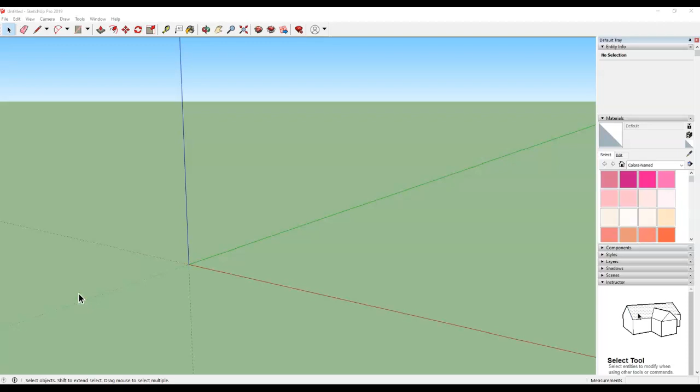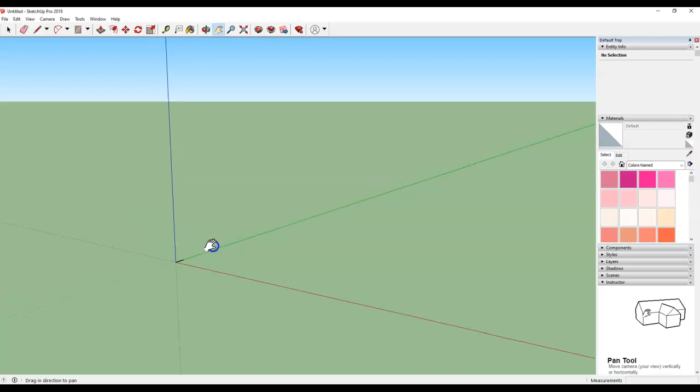Take a look at your paper and get acquainted with your measurements. We're going to get started with our pencil tool, place it on the origin, and rest the line on the green axis. We're going to key in 2.5 inches. If you cannot see the line, you'll need to zoom in and bring this closer. Position this so you have a better view, as if you were looking at this shape from above.

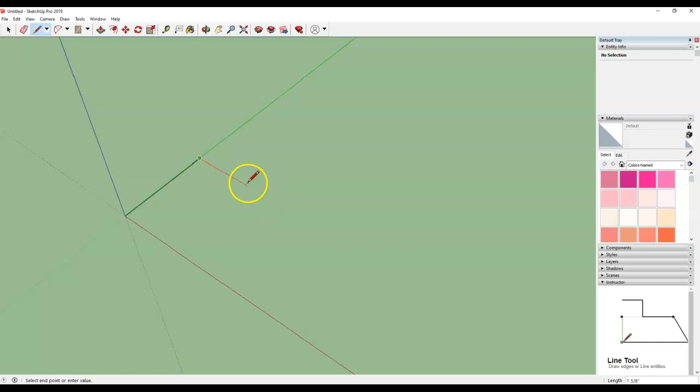Coming down from the end point on the red line, we're going to draw a line that is going to be 1.5, and we're going to go ahead and close that shape.

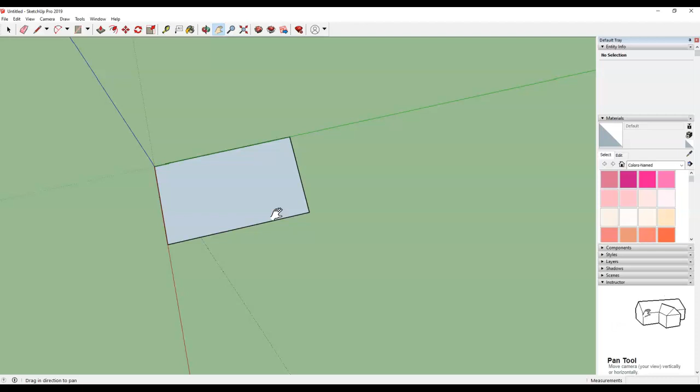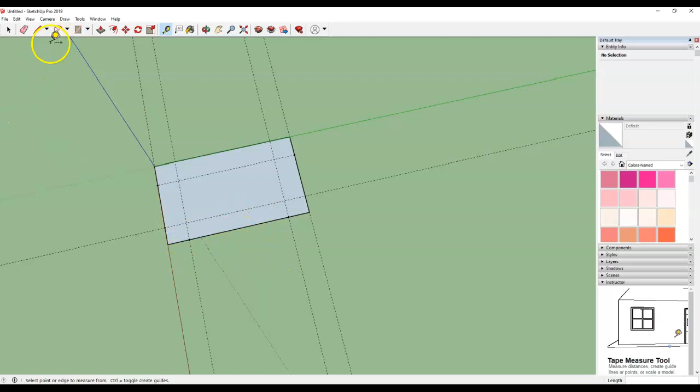Now we're going to position it so we can look at it closer and draw some of our curves and circles. To identify where you're going to draw the circles, you want to measure a distance of .375, using the measuring tape, from here to here, and then from this end point. We're looking for that 3/8. That gives you an idea where to draw your circles, and also where to draw your arc. I'm going to use the 2-point arc, going from this point to this point.

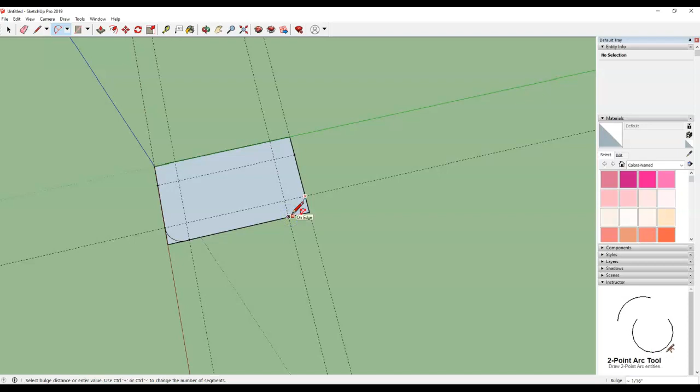And now I'm going to add this, just making sure those lines are good.

I'm going to draw my circles using the circular shape. Place that right there, and I need to type .125, enter. 0.125, enter.

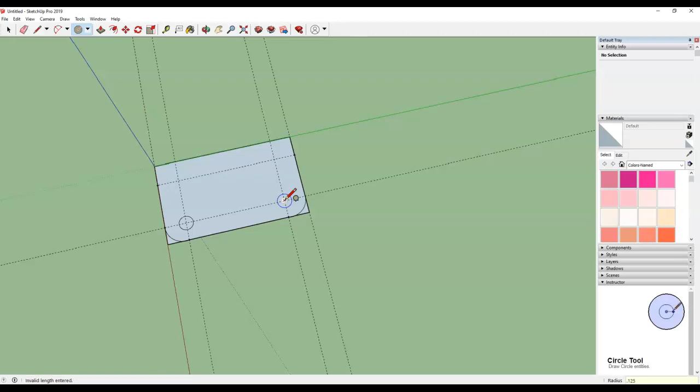Make sure you reference your drawing. Your picture has a lot of information for you in terms of the measurements you should be using. I'm going to limit myself here on this video because you really have to get into the practice of doing your own math. So if I'm quiet and not verbalizing this part, it's because this is on you—you need to figure this out.

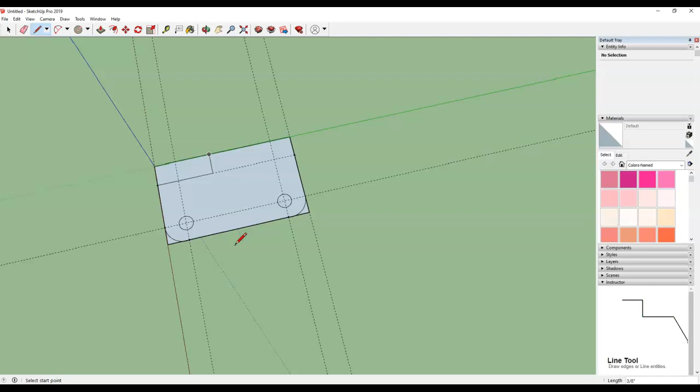If you pay attention, this gives me an idea of what part E looks like when I'm looking at it from above. So I'm going to go ahead and get rid of the things I do not need, and I have a circle here that went away.

So what are some things that I don't need? I don't need this side. I can get rid of these measurement lines that I just created to aid me.

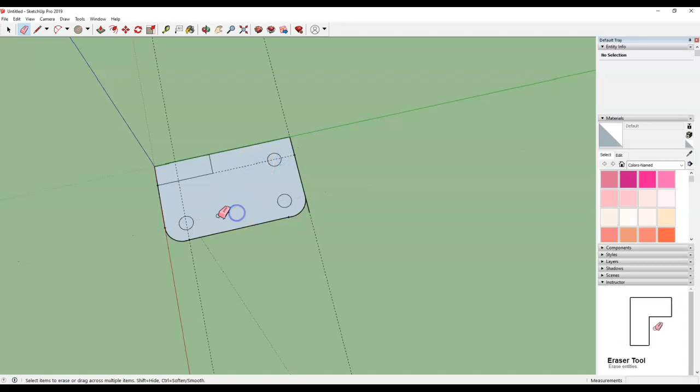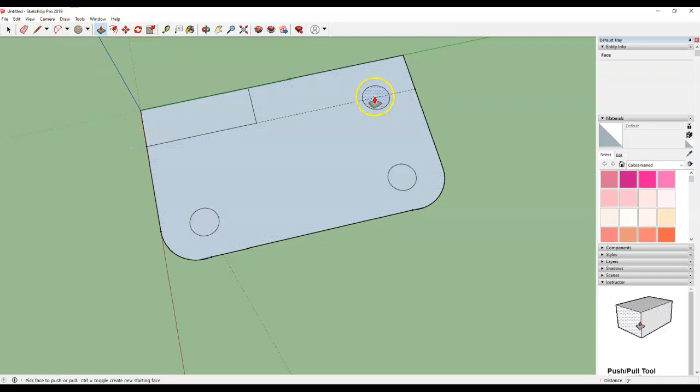I am going to use my push-pull button and come into the circles, and I'm going to erase them off a tad. I'm going to use the eraser to get rid of them, and it's going to leave a clear space there.

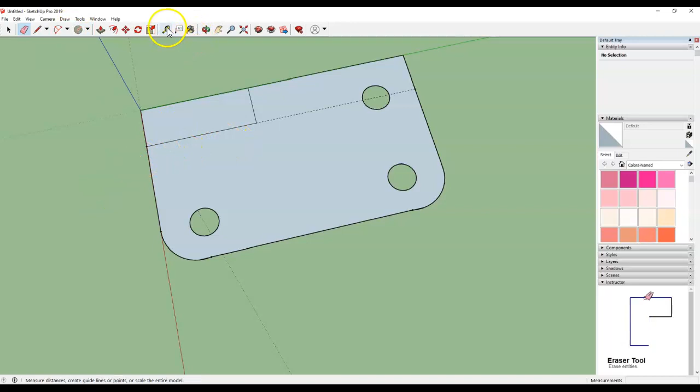I'm also going to use my push-pull tool to raise this part, and it's supposed to come up at 0.25. If I look, then I have those circles there.

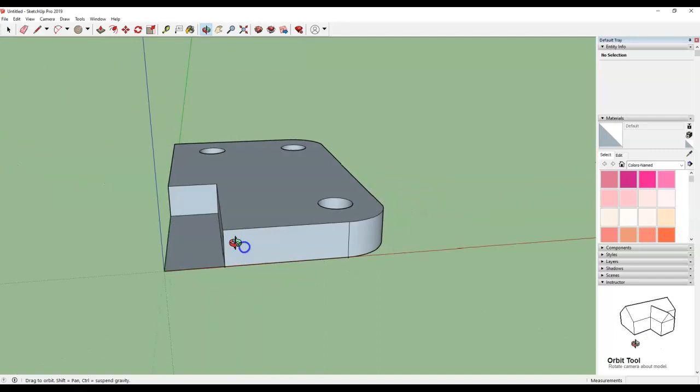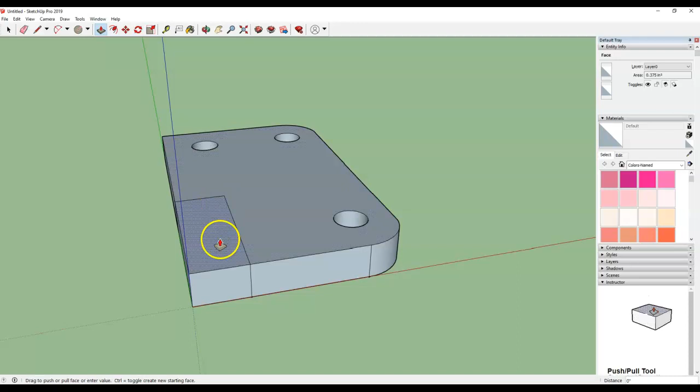So now I need to raise this part to 1.75. And this is how my shape is looking so far.

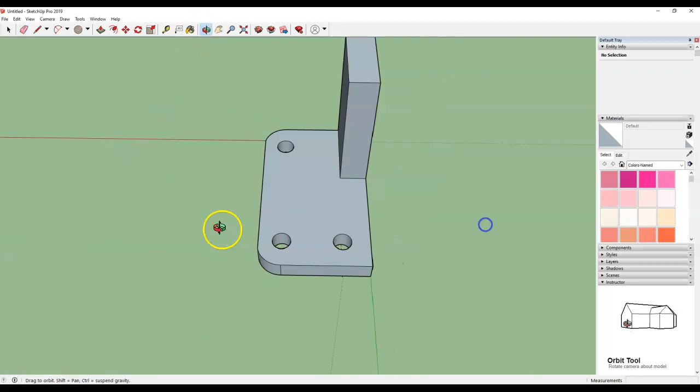There are some lines that I can get rid of. There are other lines that I can simply hide. If I cannot get rid of them, I can just hide them.

Now I'm going to work with this part right here. I know I need to use the arc tool to create that curve on top, and I need to have a circle right here in the middle. I'm going to go ahead and work on that. Again, I am not going to verbalize the measurements for you, because hopefully you guys will get that on your own.

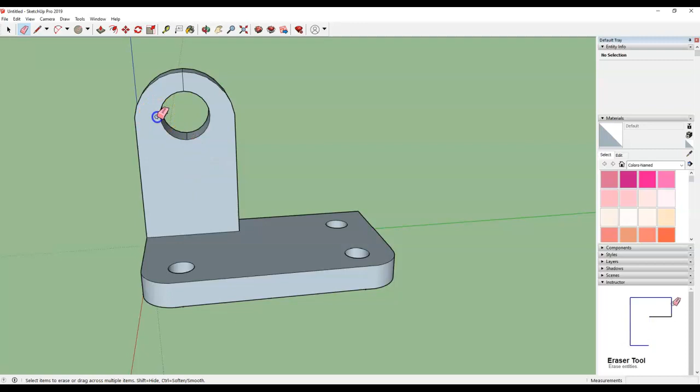And now you have part E. I'm just going to say, hopefully you guys are using the correct measurements. Again, you need to have your isometric pictorial practice sheet so you can reference it as needed. You can use the bucket, the paint bucket, to paint your creation, your shape.

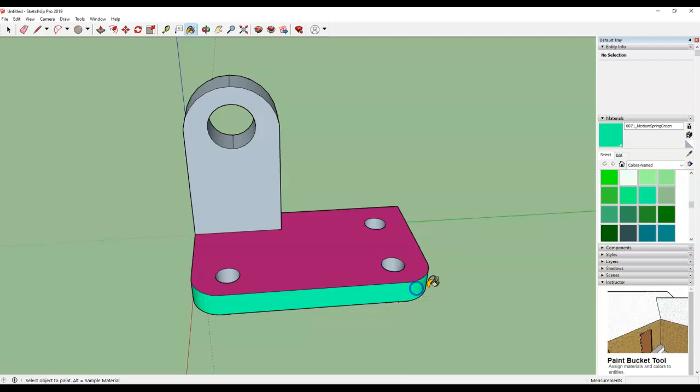I recommend you explore this tool because we will use it. It's really cool, and I think it's fun.

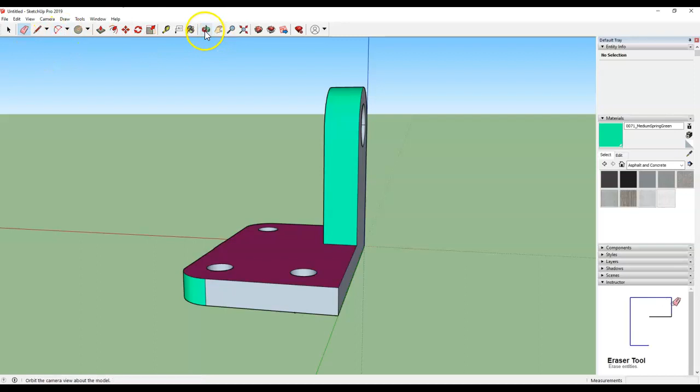So when you're finished with this, the expectation is that you're going to explore the toolbar that is here, get familiar with all these different items for you to use, all the different tools listed up here.

Use the text box, type your name on there. And then also get familiar with the measuring tape. Make sure you use it. Simply explore SketchUp and get familiar with it.